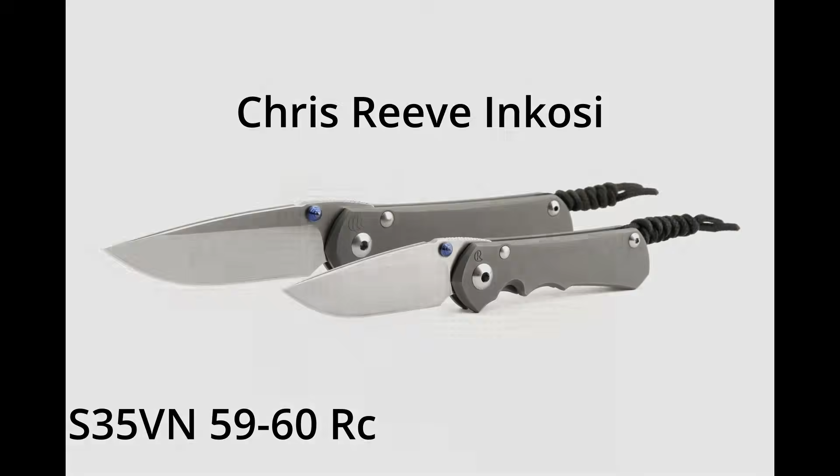Sometimes the reasons are good and sometimes they aren't. Some reasons are practical based on limitations in heat treating and manufacturing, though sometimes they have the customer in mind when making their decisions. So I'm going to explain some of those limitations and specific times when heat treating decisions can lead to bad performance, even when the hardness looks good on the spec sheet. Let's get into it.

One reason why I think there has been increased focus on hardness in recent years is because there has been a gradual evolution in hardness, especially in higher-end production knives and custom knives. We are seeing a growing number of knives available at 62 Rockwell C and above. It's not that high hardness knives weren't available before, but they seem to be becoming more mainstream, and it is a specification that certain knife enthusiasts are looking for when purchasing a knife.

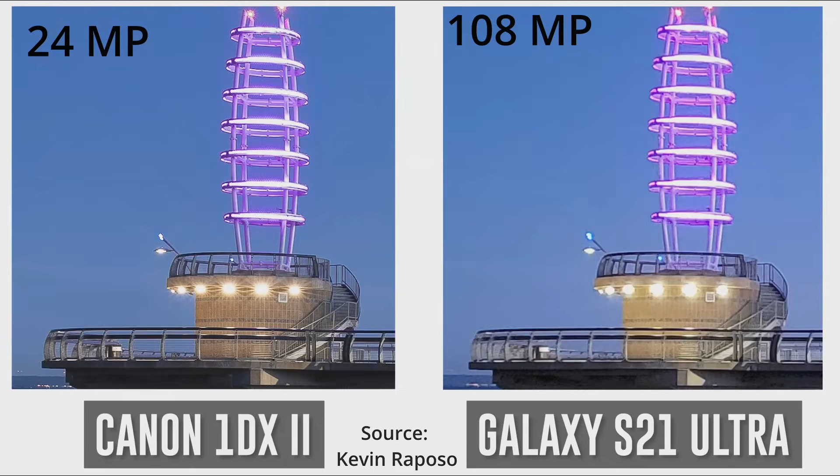For some buyers, perhaps they are focusing too much on hardness. It can be a bit like the megapixel wars of digital cameras back in the early to mid-2000s. The number of megapixels is one measure of quality, but it can be misleading because the quality of the optics is much more important than the number of megapixels. A low-end steel or a poor heat treatment can be used to give a high Rockwell hardness number, which looks impressive on the spec sheet, but ultimately the performance of the knife may be poor.

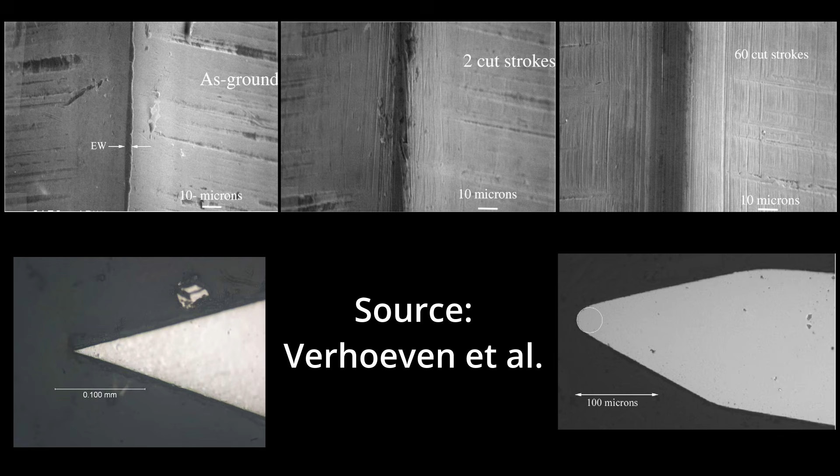So let's start with a simple subject that is somewhat easy to understand. Edges often lose sharpness to wear. The sharp edge is abraded away, leading to a rounded apex that no longer cuts as well. A steel with higher wear resistance has better resistance to sharpness loss due to edge wear. Heat treating to higher hardness means better wear resistance.

If you think about the Mohs scale of scratch hardness, talc or gypsum are easy to scratch with your fingernail. They have low wear resistance and low hardness. However, quartz, topaz, or especially diamond are very difficult to scratch and have excellent resistance to wear. Steel works similarly in that the higher its hardness, the more difficult it is to abrade away the steel. However, the differences in edge wear due to hardness are perhaps not as stark as you might think.

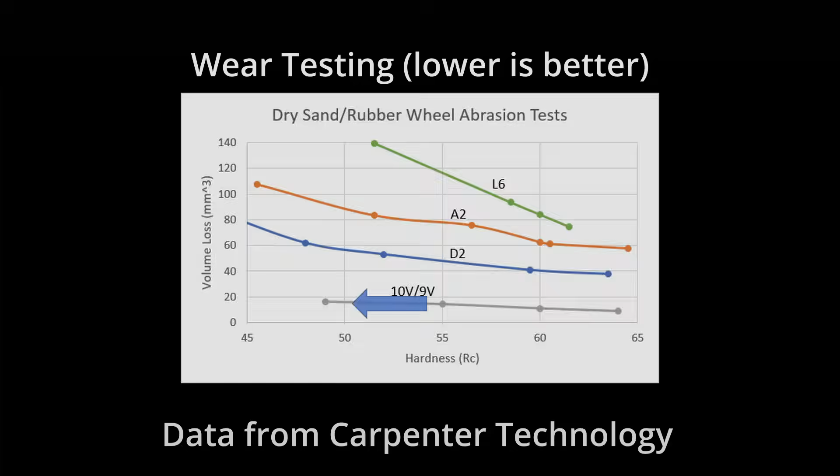Simple steels have relatively low wear resistance, and heat treating them to a high hardness only does so much. It has improved wear resistance at higher hardness, but a steel with a large amount of vanadium would still have vastly better wear resistance even at much lower hardness. The high vanadium steel has hard vanadium carbides that resist wear even if the steel matrix is not particularly high in hardness. The CATRA test is a common test of edge wear.

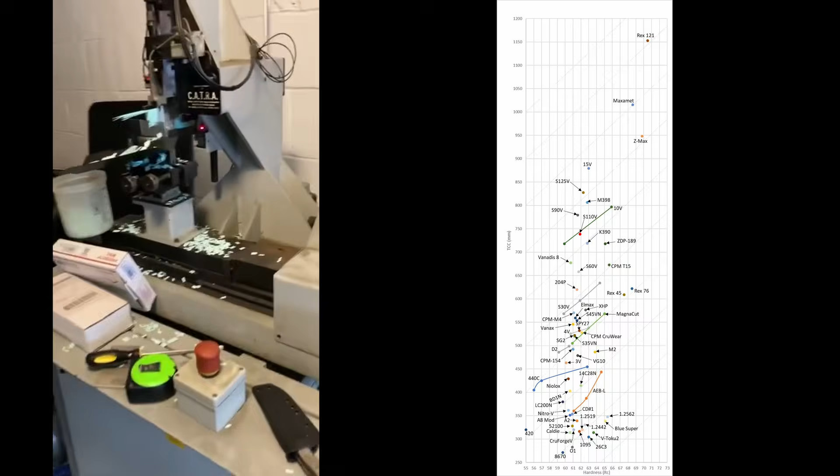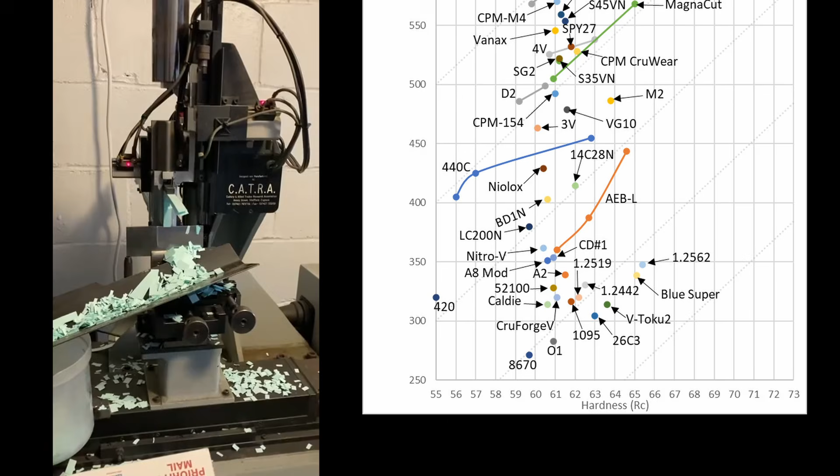You can see that 60 Rockwell C CPM 10V, a steel with about 10% vanadium and therefore a lot of vanadium carbide, has significantly better resistance to edge wear than 64 Rockwell C AEB-L, a steel with a relatively small percentage of softer chromium carbides. So better edge wear resistance is one reason for higher hardness, but is perhaps not as important as you might think.

MagnaCut has wear resistance approximately equal to steels S35VN, CPM CruWear, Vanax, Elmax, and 4V. Those are all a small step down from S30V, S45VN, and M390 at equivalent hardness. MagnaCut at high hardness can match the wear resistance of a steel like S45VN at its typical hardness of 61 Rockwell C.

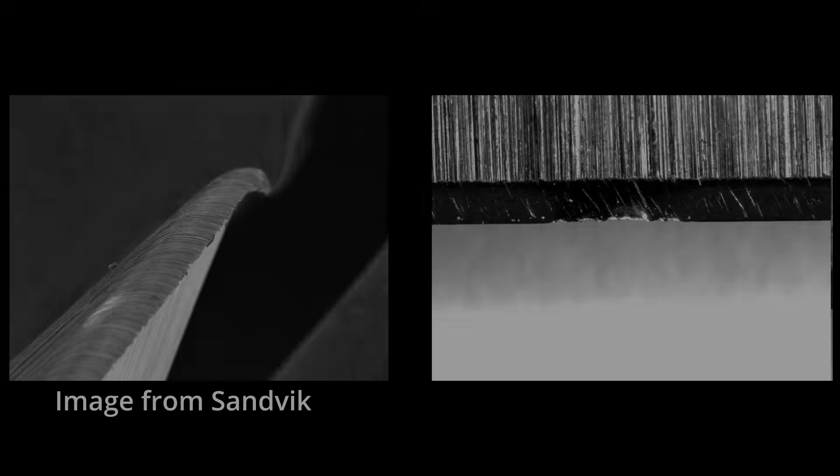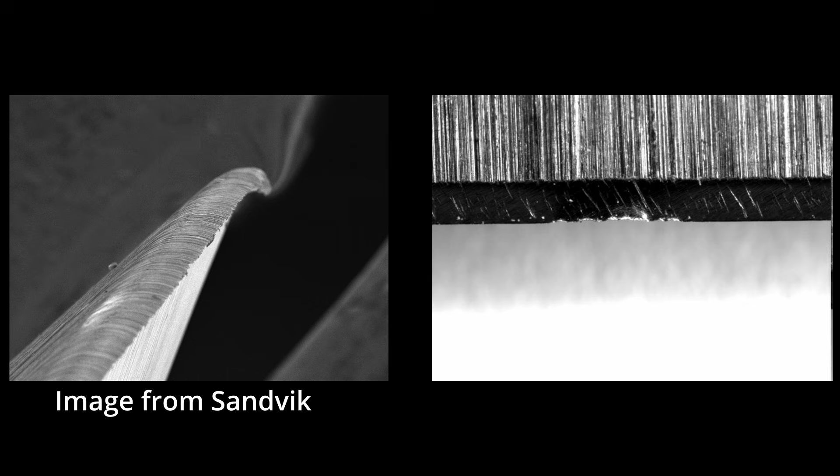Another common way that steels lose sharpness is through deformation. The edge will literally fold over or mushroom during use. This is of course most common with thin edges and high forces being applied. So this will depend on the type of knife, the user, and the specific thing being cut and in what way. Hardness correlates very well with strength, and strength is essentially the measure of resistance to deformation. So a steel with high hardness is more resistant to deformation.

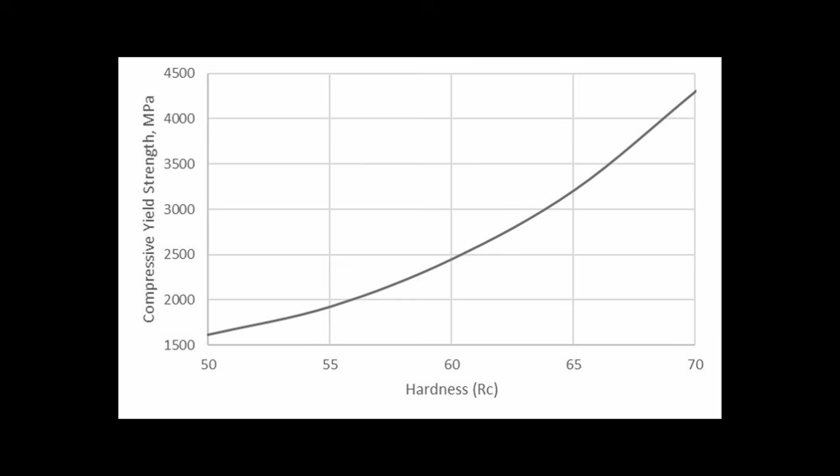In some applications, wear does not come into play that much, and you lose sharpness primarily to other mechanisms such as deformation. So the actual strength of the material may matter more than its wear resistance. MagnaCut can be heat treated to 64 or even 65 Rockwell C when heat treated carefully along with cryogenic processing. So its upper limit for hardness is relatively high. That doesn't necessarily mean that we want to use it at that hardness, but it has that capability.

As an example of an edge retention test with a mixed mode sharpness loss, I have here a test done by knife maker Sean Houston that he posted to the Spyderco forums.

He used several Spyderco PM2s in different steels and measured the change in BESS sharpness with cuts in 3/4 inch manila rope. Each knife was sharpened to 14 degrees per side using a fixed angle sharpening system and tested at different points on the way to a total of 127 cuts.

The MagnaCut PM2 here is a prototype and is not available for purchase.

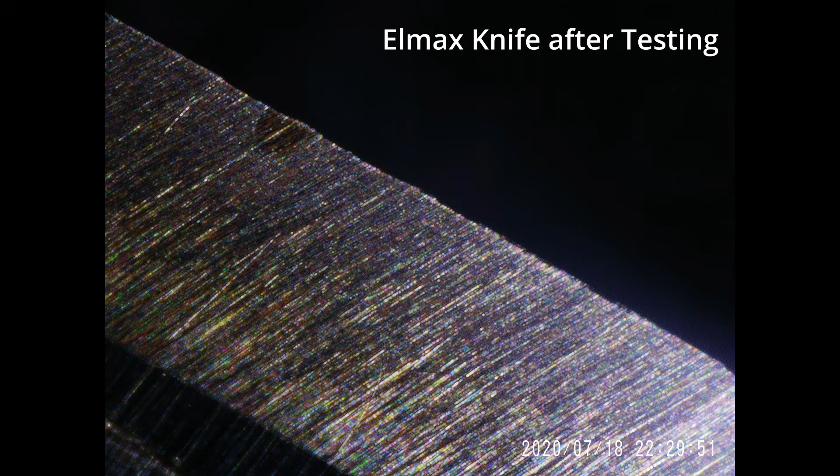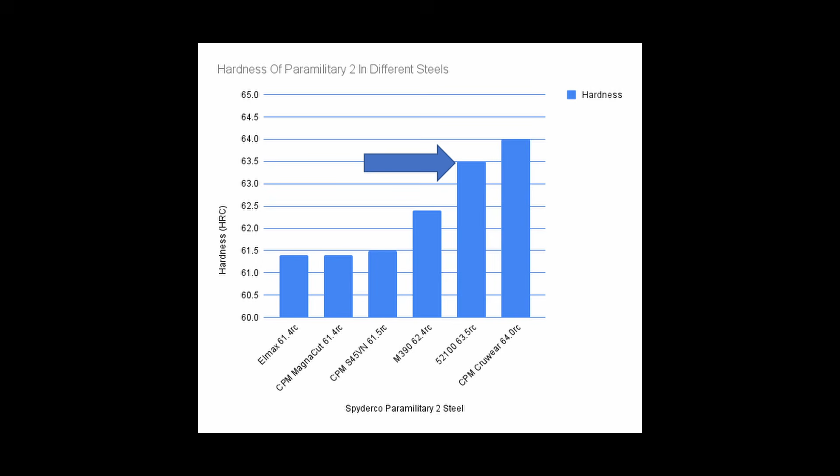Sean told me he was surprised by how much force was required to cut through the rope, especially at later stages of the test, and looking at the edges under magnification revealed deformation. The hardest knives were CPM Cruwear at 64 Rockwell C and 52100 at 63.5 RC, and they showed the least deformation as expected. However, edge wear was also seen, most visibly apparent in the 52100 knife, as that steel has by far the lowest wear resistance in this comparison, and so still saw the worst sharpness of any knife at the end of the test.

S45VN, Elmax, and MagnaCut were similar to each other around 61.5 Rockwell, and also performed similarly on rope. However, S45VN and Elmax have slightly better wear resistance than MagnaCut, and also lasted a bit better after 127 cuts on the rope.

M390 was the most wear-resistant steel tested and was also relatively high in hardness at 62.4 RC. CPM Cruwear has somewhat less wear resistance than M390 even at this high hardness of 64 Rockwell, but because of its excellent combination of strength and wear resistance, it actually nearly matched M390, even though M390 has somewhat better wear resistance. CPM Cruwear and MagnaCut have very similar wear resistance, so we would expect 64 Rockwell MagnaCut to perform similarly.

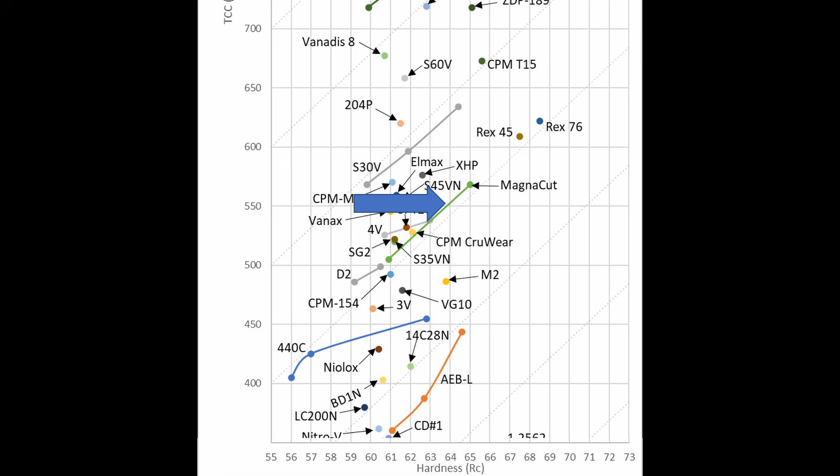This gives us an idea of how much extra edge retention you can get in a cutting scenario that sees high forces and therefore significant amounts of deformation at the edge. However, if the edge geometry of these knives was different, or if the forces were lower or higher in the cutting test chosen, the order of the knives could change drastically.

This is why sometimes I prefer to test different properties separately, such as CATRA for edge wear, hardness for strength, toughness for chipping resistance, etc., so that we can choose steels based on their strengths and weaknesses.

When we do a test like rope cutting, there are a combination of factors at play, and the edge geometry we choose will also change the balance of which properties are important. This can make it difficult to figure out exactly what is going on. That doesn't make rope cutting tests bad, it just makes our analysis more challenging.

I like the set of tests that Sean did because it illustrates well how hardness and wear resistance can add up together in a specific scenario.

Another of the major dulling mechanisms is microchipping. When you lose sharpness to microchipping, the steel does not have sufficient toughness for the intended use. Toughness is a measure of how well a steel resists fracture.

Microchipping is especially common in knives with thin edges, so steels with high toughness are preferred for applications that lose sharpness to microchipping. Fracture can be quite sudden, leading to very rapid sharpness loss, so generally we prefer edge wear to be our primary mode of dulling. Microchipping is most common when cutting hard materials and any time that chopping is involved.

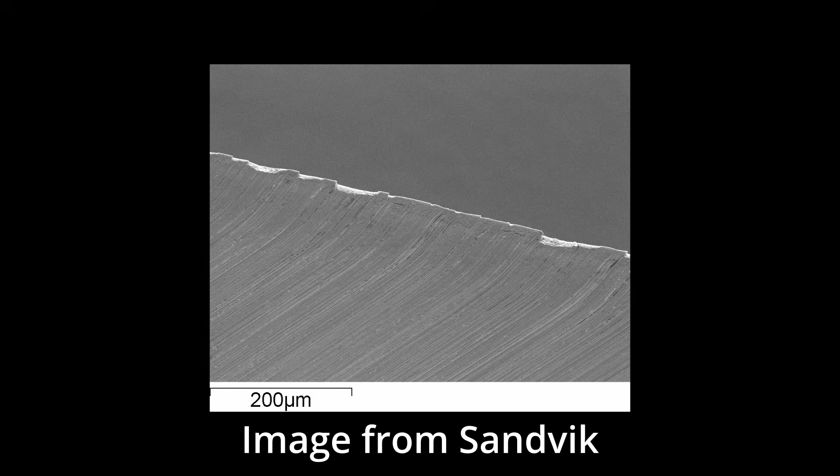Which leads me to the subject of edge geometry. If your knife is seeing deformation or microchipping, you need to sharpen it with a more obtuse angle. This gives the knife better resistance to deformation and microchipping by giving it a more robust edge.

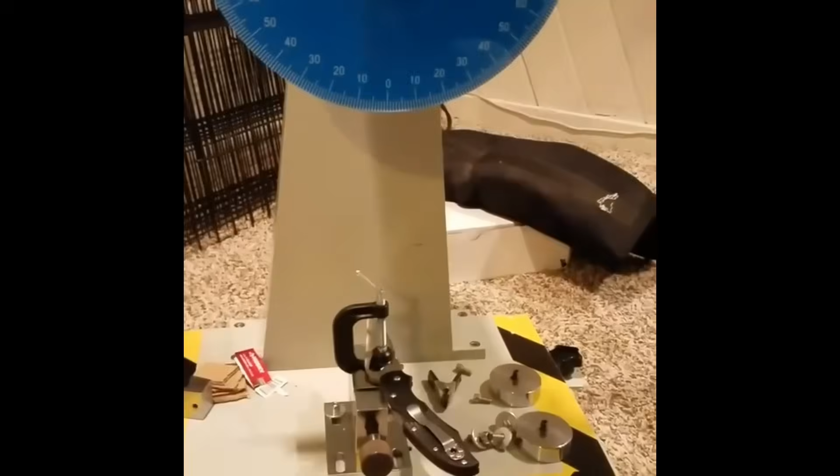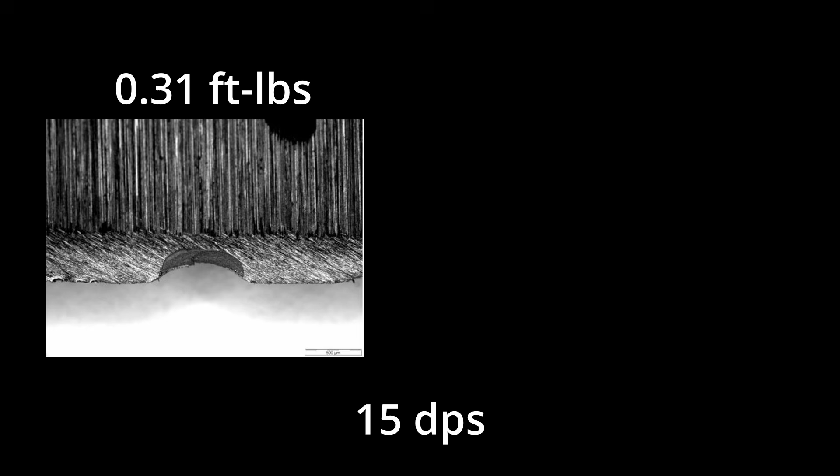In a test I did on AEB-L knives, I impacted them with a steel rod at different energy levels, from a gentle tap to a loud smack. With an edge sharpened to 15 degrees per side, only 0.31 foot-pounds led to a significant chip in the edge, and 1.4 foot-pounds was so severe that the chip exceeded the size of the edge bevel, at which point the chipping is catastrophic. With an edge sharpened at 25 degrees per side, 2 foot-pounds led to only minor rippling of the edge and needed 4 foot-pounds for catastrophic chipping.

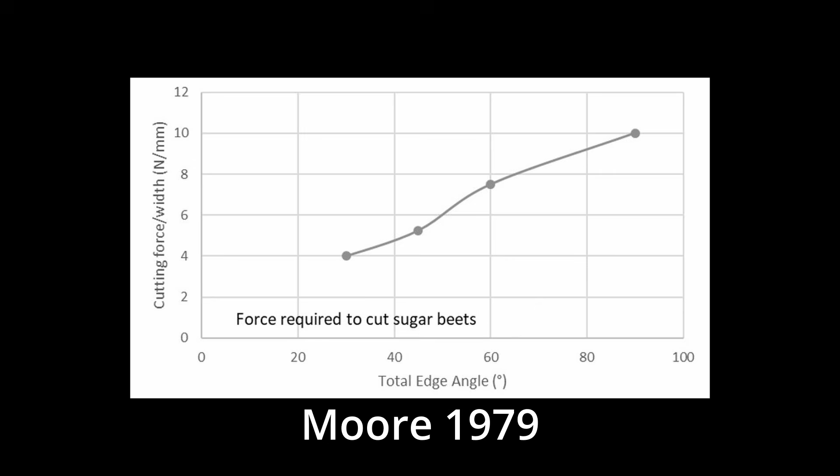So why not just sharpen everything to a very obtuse angle and make it super strong and tough? Because the more acute the angle and the thinner the edge, the better it cuts. This is a property called cutting ability, which is separate from sharpness. Sharpness is defined by how small our edge radius is, but cutting ability is controlled by the overall edge geometry.

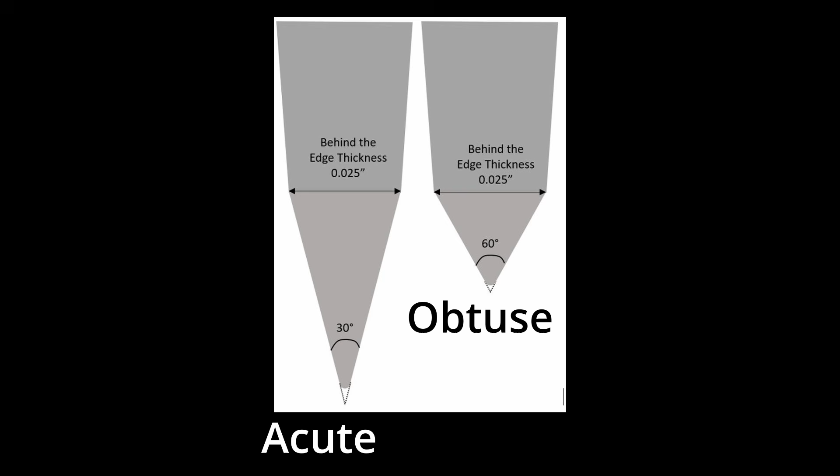So if the sharpness is identical, the edge that is thinner and more acute will cut more easily and with less force. And this doesn't just mean that the knife will pass through what you are cutting more easily, but it also means better edge retention.

In a CATRA study on 154CM and CPM 154, they varied the angle from 10 degrees per side all the way up to 28 degrees per side, or 20 to 56 degrees inclusive angle.

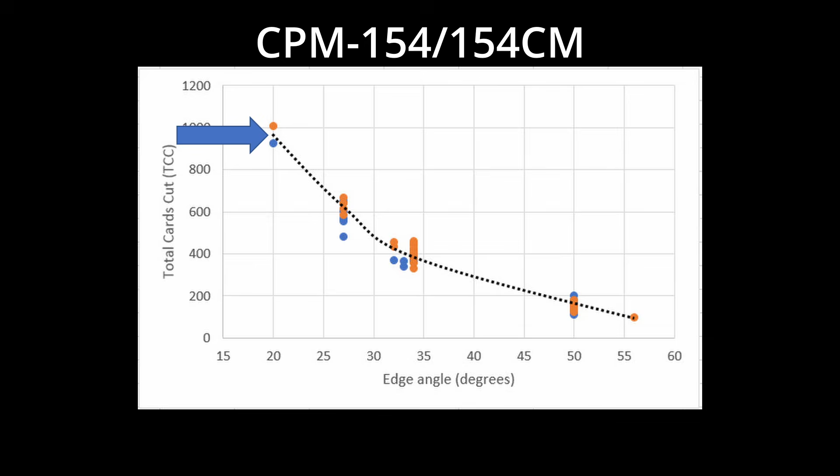The 10 DPS edge had more than 5 times the edge retention of 28 degrees per side. A steel with average wear resistance can outcut a so-called super steel with high wear resistance if the edge angle is dropped by only a few degrees per side.

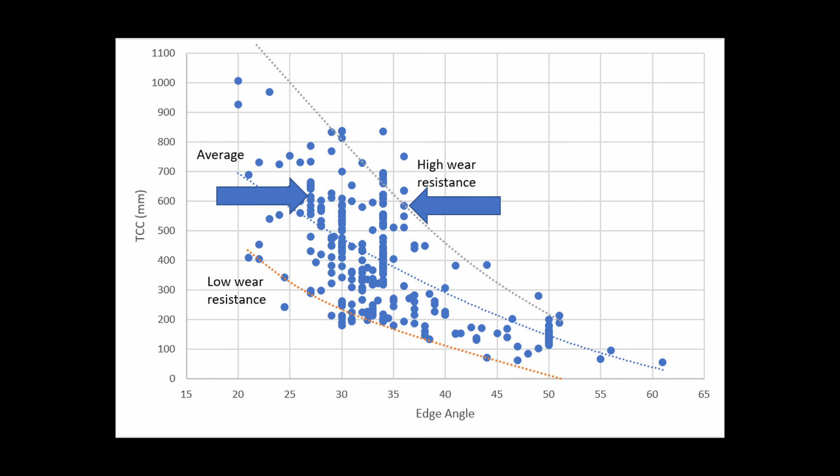For example, let's compare CPM 154 and S90V. CPM 154 has only 60% of the wear resistance of S90V. This data point is S90V sharpened to 18 degrees per side, which cut about 585 mm of cardstock in the CATRA test. CPM 154 sharpened to 13.5 degrees per side outcut it at 615 mm of cardstock cut.

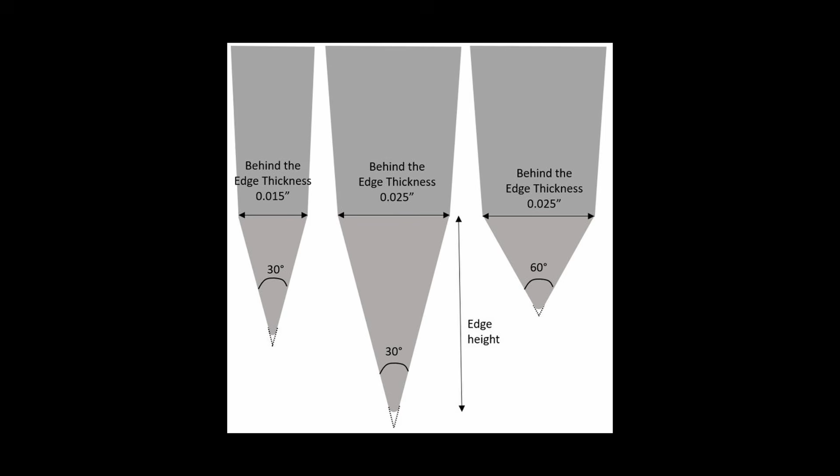So this trade-off in edge geometry is one of the major decisions with any knife, both by the knife manufacturer and how thin and acute to go, but also by the user, who of course has the option to sharpen his knife how he wants.

Go very acute and get superior cutting ability and edge retention, or go more obtuse and get better resistance to deformation and chipping. I generally recommend trying more acute and seeing how the knife does. If you start to see deformation or chipping, then back off a couple degrees until you find the sweet spot for how you use your knife.

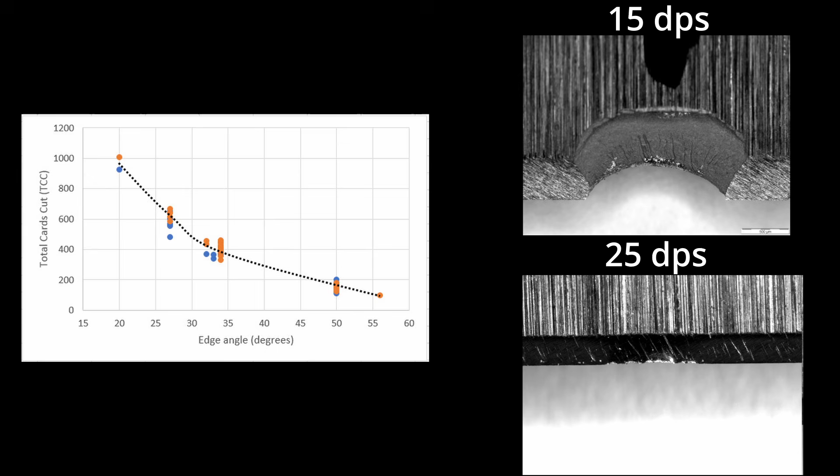Where steel and heat treatment comes in is how well it can handle a thin, acute edge without deformation and chipping. We want high hardness for resistance to deformation and high toughness for resistance to chipping. Sometimes this combination of properties is called edge stability, or the ability of the steel to handle an acute edge without deformation or chipping. Unfortunately, having increased hardness almost always means reduced toughness.

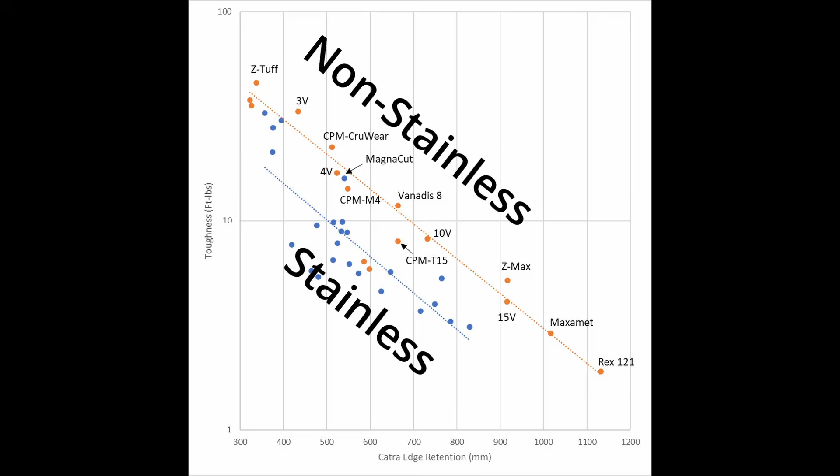So having a steel that maintains high toughness at high hardness is desirable so that we have the best cutting performance possible. Non-stainless powder metallurgy steels generally have the best combination of hardness and toughness for a given level of wear resistance. If we look at a fixed level of wear resistance, in the past steels like CPM 4V and CPM CruWear had approximately 2 times the toughness of S35VN, even though all three have similar wear resistance.

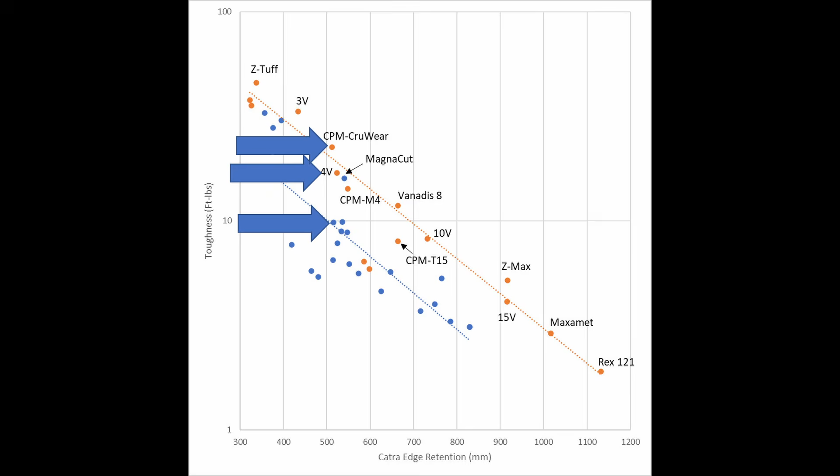So CPM 4V can be heat treated to a higher hardness for better cutting performance without being in danger of microchipping. At the higher hardness level, it also has increased edge wear resistance for overall better performance than the S35VN.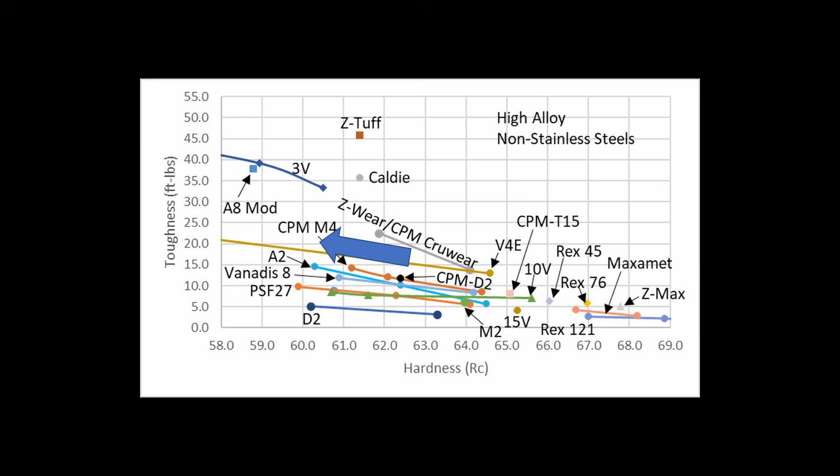Or if you are making a knife designed for hard tasks with more danger of chipping and deformation, you can leave the hardness at a lower level, such as 60 or 61 Rockwell, and take advantage of the superior toughness.

The benefit to MagnaCut is that it matches the toughness and wear resistance of non-stainless steels like 4V, and therefore puts us in a new category for stainless steels.

It can be heat treated to higher hardness for enhanced edge stability for more acute edges, better cutting ability, and better edge retention without sacrificing toughness when compared with previous stainless steels, or kept at a more conservative hardness when raw toughness is desired.

MagnaCut toughness at 64 plus Rockwell C matches or exceeds the toughness of Vanax, S35VN, or Elmax when they are at only 61 Rockwell C or lower. Those were the previous gold standards for toughness with powder metallurgy stainless knife steels.

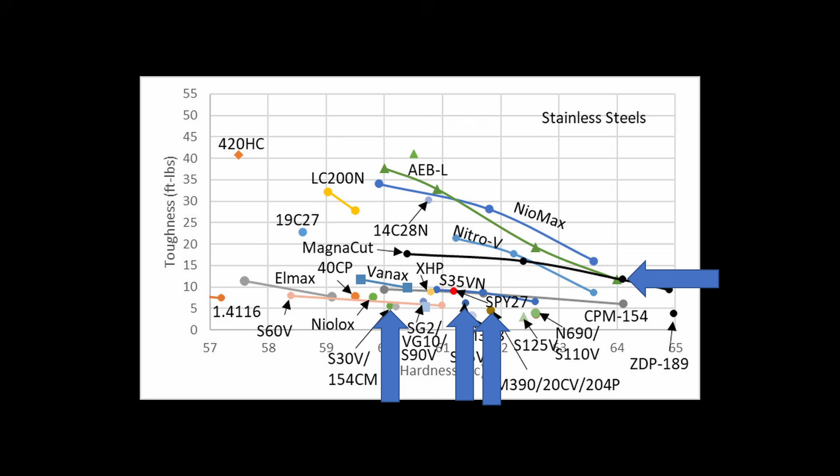For the somewhat higher edge retention steels like S30V, S45VN, and M390, MagnaCut at 64 Rockwell C has double the toughness of those steels when they are at their typical hardness of 62 Rockwell or below. So MagnaCut has the potential to handle thinner, more acute angles for superior cutting ability and edge retention.

And if we compare in the 60 to 61 Rockwell C high toughness range, MagnaCut has significantly better toughness than other PM stainless steels such as Vanax, S35VN, XHP, and CPM 154.

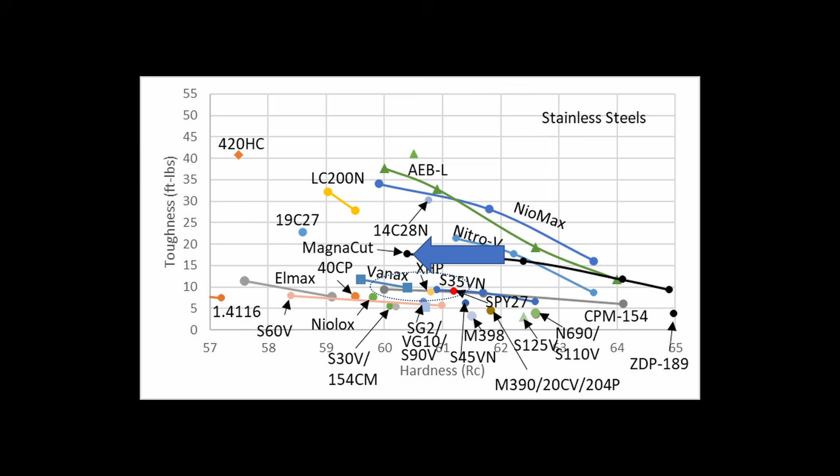As a quick sidebar, another mechanism by which an edge can dull is through corrosion. I did an experiment a few years ago with knives of different levels of corrosion resistance. I dipped each knife in lemon juice and sat them in air and measured after different periods of time. The sharpness loss was significant on the carbon steel and almost non-existent with 440A stainless.

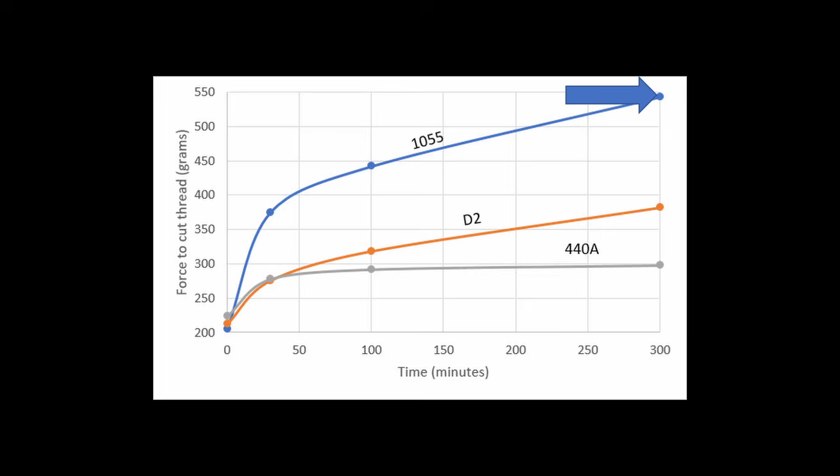So the high corrosion resistance of MagnaCut is also a benefit for this dulling mechanism. There are a couple of heat treating and processing parameters for corrosion resistance, but they don't all fit into the topic of hardness, so I won't be going into depth on those in this video.

So let's get into the specifics of heat treating MagnaCut and why manufacturers and heat treaters might be picking certain hardness values over others. The place to start is the datasheet, which is hopefully where the heat treaters are starting. A feature of several Crucible datasheets is the recommended heat treatment section. For example, the S30V datasheet says to use a 1950 degree austenitize and a temper at 600 degrees for a final hardness in the range of 58 to 61 Rockwell.

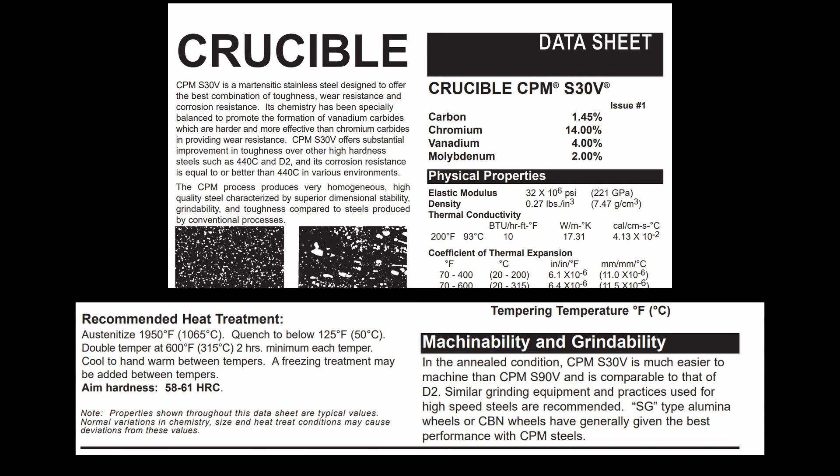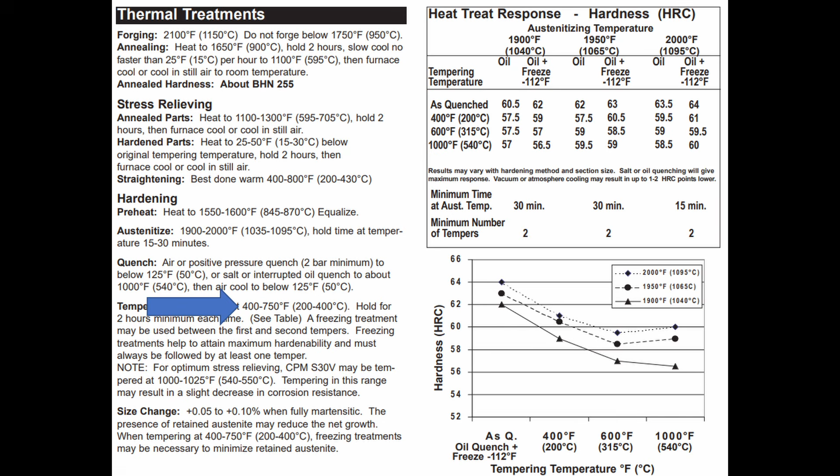However, that is just one set of temperatures among many that can be chosen. The datasheet also says that you can austenitize between 1900 and 2000 degrees Fahrenheit and temper between 400 and 750 degrees. There is also an optional freezing treatment that can be performed for extra hardness.

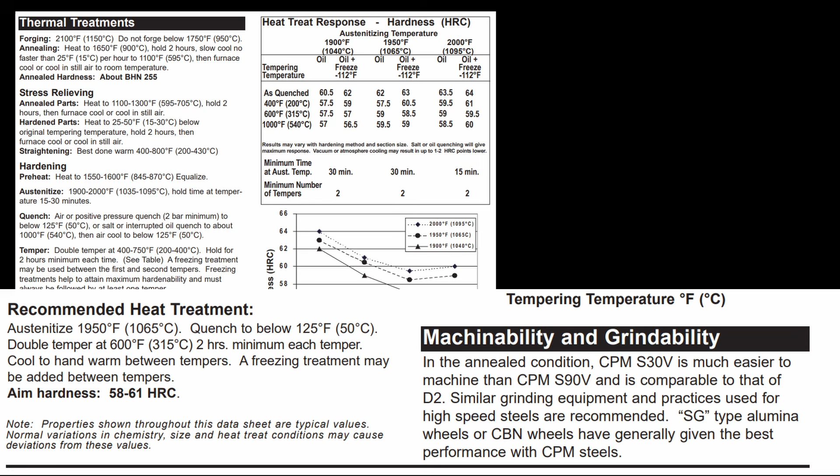The recommended heat treatment is to provide the most general recommendation to give good performance without extremes. It shouldn't require extremely careful heat treating, meaning if the temperature is off by 10 or 20 degrees in any given direction, the steel should still be fine. The further away that you get from that recommendation, the more trouble you can get into if you don't know exactly what you are doing.

These hardness values are for a relatively fast quench, meaning with an oil quench or what's called a plate quench. This is common with custom knife makers where they put the hot steel between two aluminum plates and the plates draw heat out of the knife. It is faster than just cooling in air while also helping to keep the knife flat.

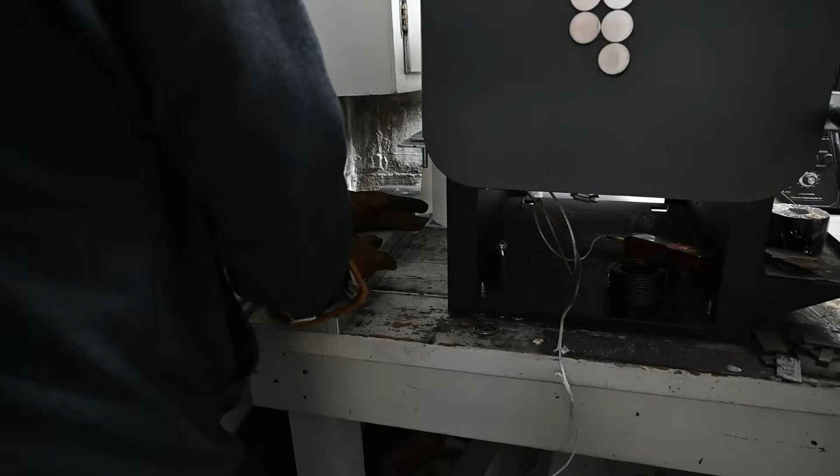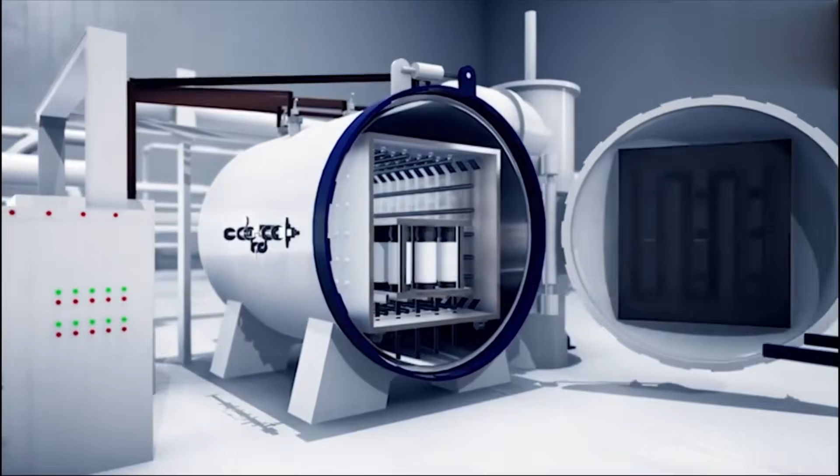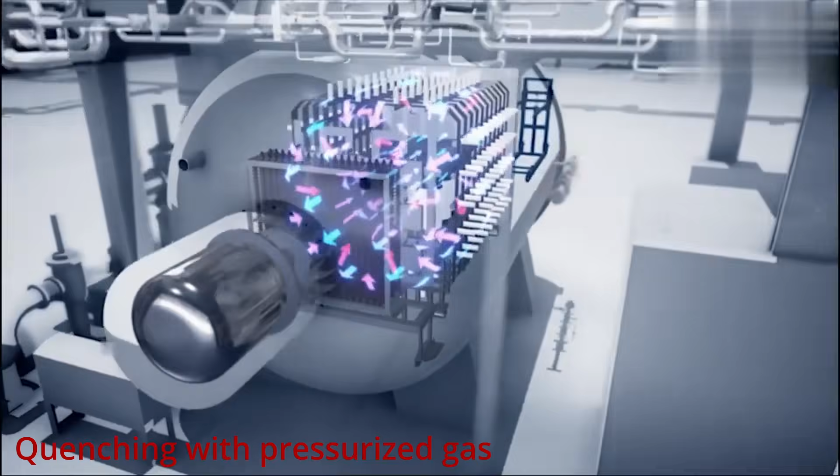We also did tests using vacuum furnaces at Peters Heat Treating where the steel was given an air quench under 2 bars of pressure. The steel was somewhat softer due to the slower quench speed, but with cryo the hardness was still comparable, around 61.5 Rockwell C. So depending on the specifics of the heat treatment setup, we might expect manufacturer knives to be 61 to 62 Rockwell if they follow these recommendations.

Will they follow the recommendations? As with anything, it depends on how much the heat treater thinks they know better than the steel manufacturer. It can be surprising what any given person or company decides to do sometimes.

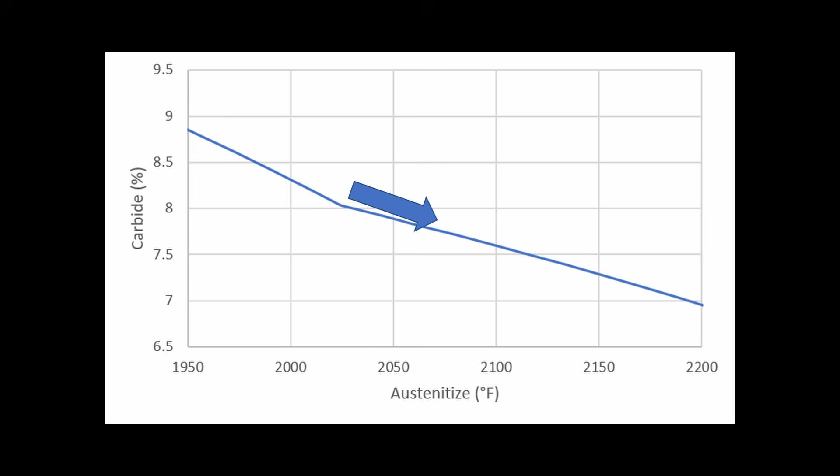If you want more hardness, there are two major ways of accomplishing it. One is with a higher austenitizing temperature, and one is with a lower tempering temperature, though cryogenic processing also comes into play. With a higher austenitizing temperature, more carbide is dissolved, putting more carbon in solution, and the higher the carbon in solution, the higher the hardness.

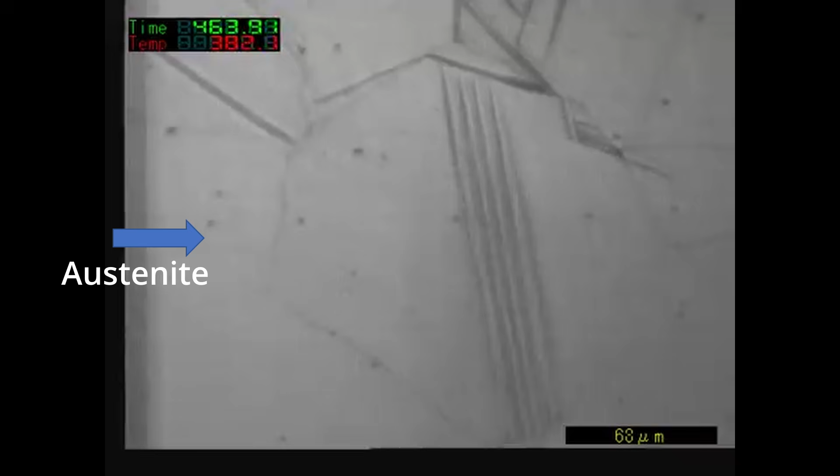However, at a certain point, the hardness begins to drop because we get what's called retained austenite. At high temperature before the steel is quenched, you convert the steel to a non-magnetic phase called austenite, and then during quenching, it transforms to a hard phase called martensite that gives us the high strength and wear resistance that we want. However, the transformation can be incomplete, leaving us with some retained austenite.

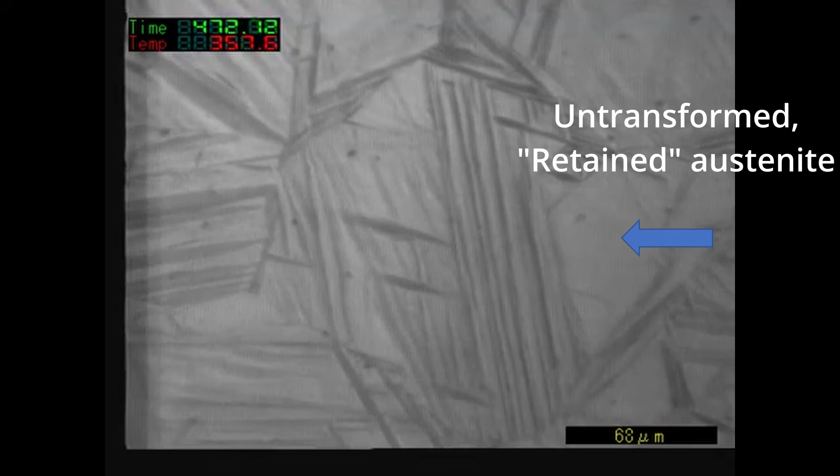When more carbon and alloy is dissolved at high temperature, this reduces the temperatures where martensite forms to a point where the transformation is incomplete at room temperature. A cold or cryo treatment can further cool the steel where more austenite transforms for more martensite and higher hardness. I have a separate video about cryo that explains how all of this works.

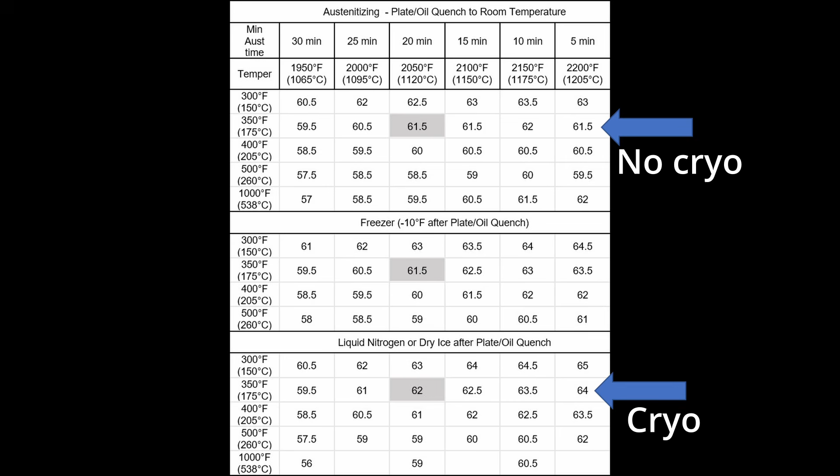Retained austenite in small amounts can improve toughness, but it will reduce strength and hardness, and generally we don't want it. In large amounts, it can actually reduce strength even at a given level of hardness, so we are going to take a quick detour and talk about different measures of strength.

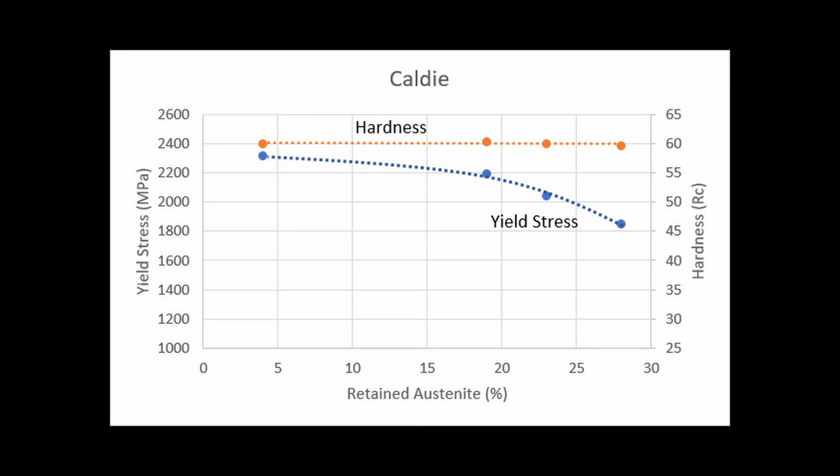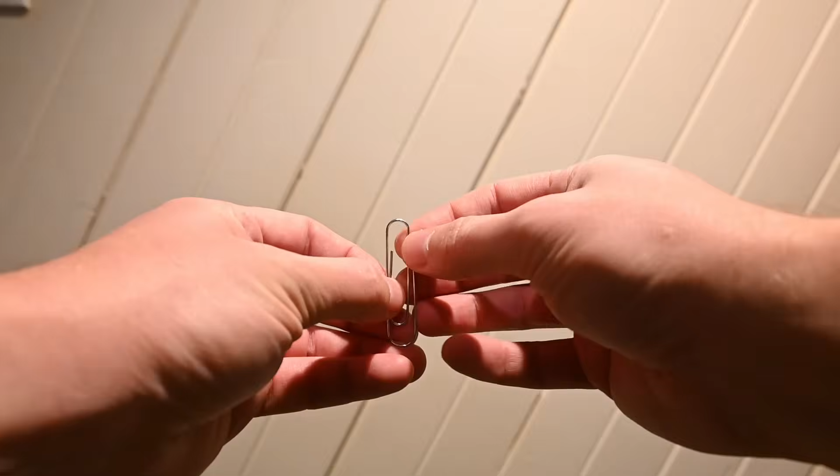When we pull or compress a material, we can measure how it responds to stress. Under small amounts of stress, the material will lengthen or compress, and when we let go, it will bounce back to its original shape. Think of this like a rubber band. Or if you can imagine bending a paperclip, this is like bending the paperclip a small amount and letting go. However, if you apply more stress, at some point the steel will permanently deform and no longer return to its original shape.

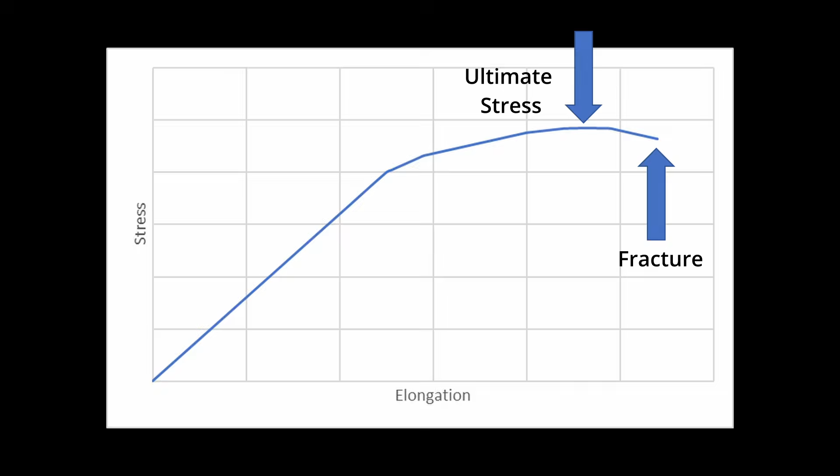This means that you have exceeded the yield stress of the material. If you bend the steel too far, you will exceed the ultimate tensile stress of the material and it will break. Hardness correlates most strongly with ultimate tensile strength. However, it is the yield strength that determines how easily the material permanently deforms. And in some cases, we can have a material with a relatively low yield strength when compared with its ultimate tensile strength or its hardness. In this case, the steel will deform more easily than we expect based on its hardness.

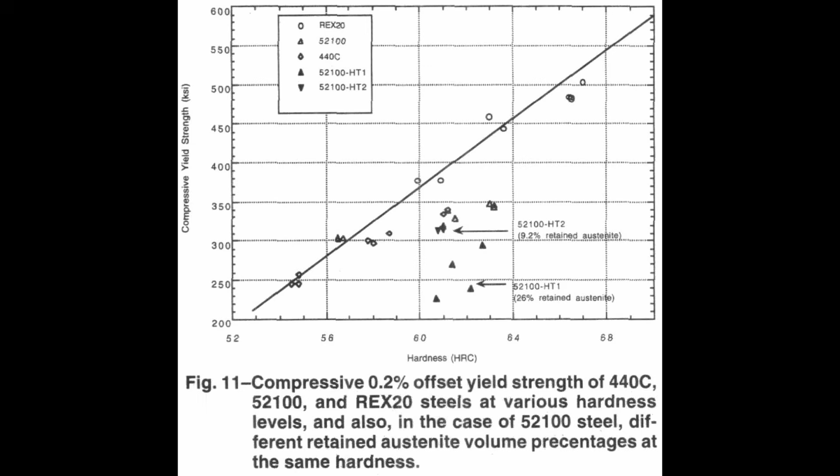Another side effect is that steels with excess retained austenite show very poor sharpening behavior. I sometimes see cases where people say that such and such steel is very difficult to sharpen, but what they are actually seeing is a poor heat treatment.

In a big Catra study I did, I was able to relatively easily sharpen a wide range of steels, but one in Rex 121 that had high retained austenite in it never seemed to come up sharp. I would get a burr, and then once the burr came off, it would leave a ragged edge that wasn't particularly sharp. We later did a follow-up study with a different heat treatment of Rex 121 and had no problems getting it sharp. So sometimes people blame difficulty in sharpening on a steel being very wear resistant, when in fact it is the heat treatment that is to blame.

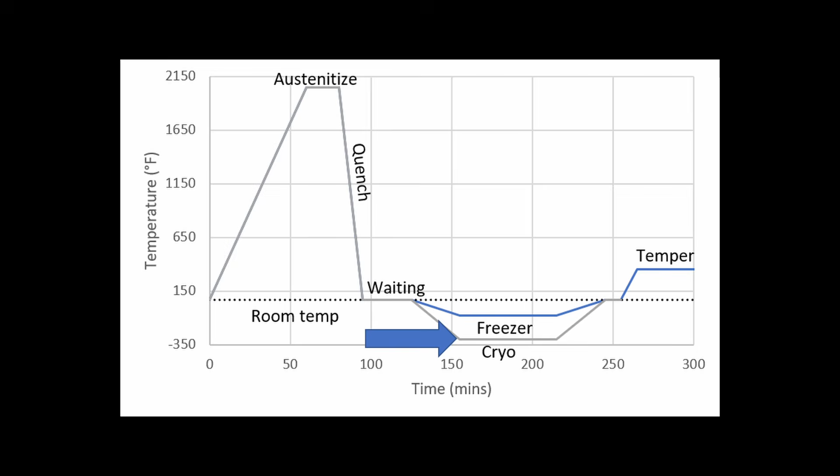Many heat treatment shops have cryogenic processing or at least some kind of freezing treatment available, but the type of process they can do varies. They might have a freezer that goes down to negative 80 degrees Fahrenheit, or they might have a liquid nitrogen freezer that goes all the way to negative 300 degrees. They may have a freezer that cools down the steel very slowly to the target temperature, or a freezer that sits at the low temperature and the steel cools down rapidly.

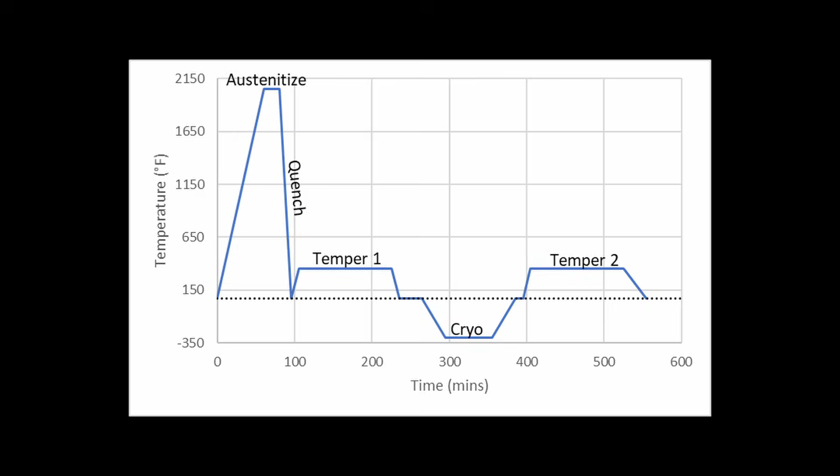Some shops will do a temper on the steel before doing the cold treatment. Some shops will move the steel directly after the quench to the cold treatment, while others, because of various logistical issues, may leave the steel at room temperature for some period of time, maybe hours, before moving it to the freezer.

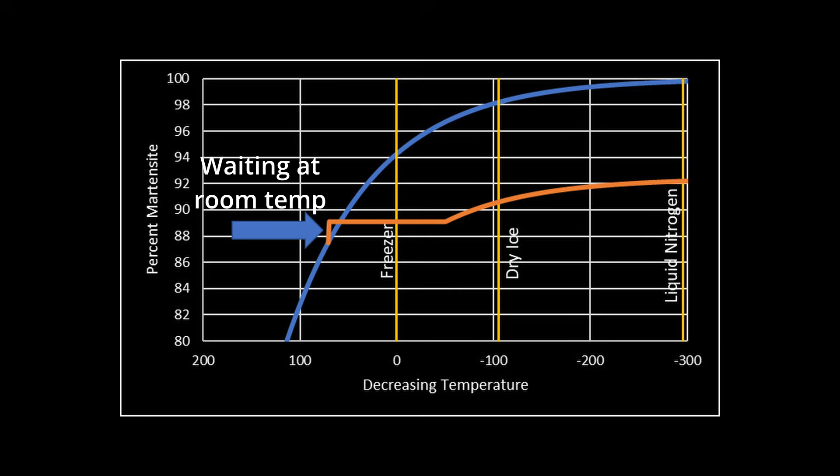All of these differences can matter. When steel sits at room temperature, or especially when it is tempered first, some of the retained austenite is stabilized and will not transform during a cryo treatment.

So part of the reason why 2050 degrees is the recommended heat treatment for MagnaCut is because even if they are doing a temper before cryo or letting the steel sit for a long period of time, it won't have excessive retained austenite. To get the steel to its maximum levels of hardness, it would require a heat treating company or knife maker that knows how important it is to go straight to the cold treatment after quenching to get the maximum benefit. However, part of the reason they do tempering before cryo is because it reduces the risk of warping or cracking of the knives.

In my opinion, it is more important to get the maximum performance benefit of the cryo treatment, but the knife companies or heat treating companies may not share that view when they have thousands of knives they need to produce. To get 64 Rockwell C MagnaCut, and this is true of most stainless knife steels that can achieve that hardness, it requires an increased austenitizing temperature in combination with a cryo treatment that occurs directly after quenching to room temperature.

Another method for having increased hardness is to use a lower tempering temperature. You can temper at 300 degrees or even 275 or 250 degrees Fahrenheit and have increased hardness. There are a couple potential issues with this approach, however.

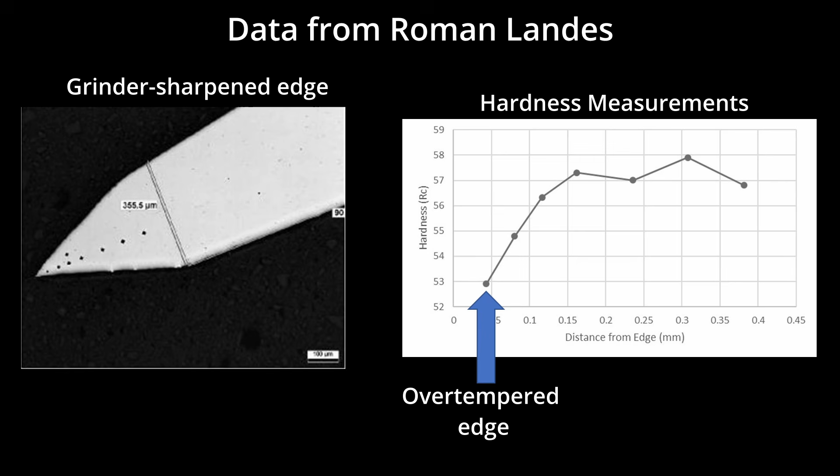One is that the blade, and especially the edge, can overheat when it is ground and sharpened. The lower the temperature of tempering, the easier it is to overheat and over-temper the edge, which would then reduce hardness. If the steel is heated above the tempering temperature, it is effectively tempered at that higher temperature, reducing hardness.

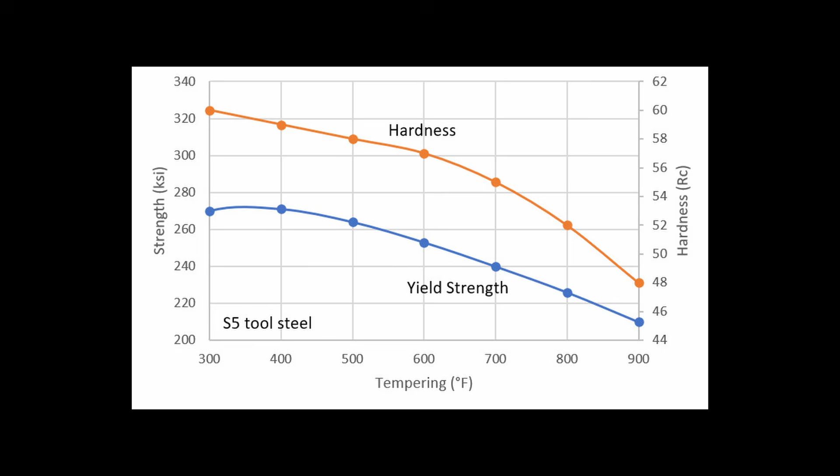Another concern is that even though the hardness is higher with these very low tempering temperatures, often the yield strength goes up as the tempering temperature increases in the low temperature range. So the steel may deform more easily than you think based on the hardness value. I usually don't recommend tempering any lower than 300 degrees Fahrenheit.

Some knives have coatings applied to them that require the knife to be heated to 500 degrees or even hotter, which would mean the knife would effectively be tempered at that temperature. So sometimes knife companies use what is called the secondary hardening range of tempering.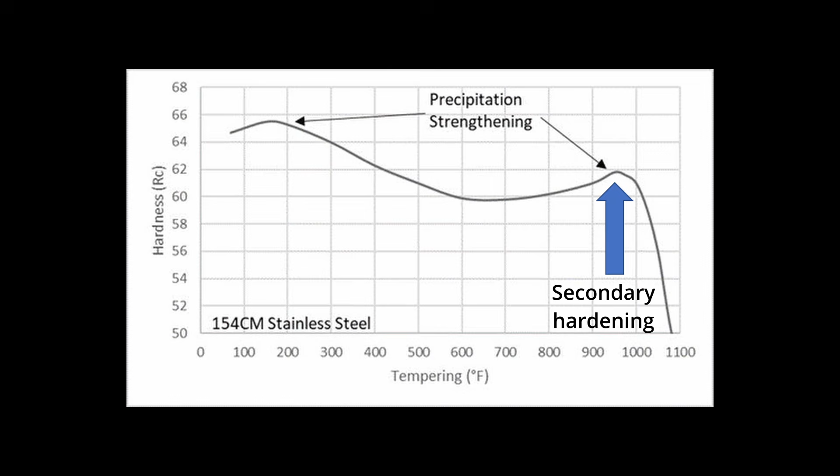When you temper above about 750 degrees, the hardness starts to increase again with certain high alloy steels and stainless steels. So MagnaCut could be tempered in the range of 950 to 1000 degrees. This would limit the hardness to around 62, maybe 63 Rockwell C.

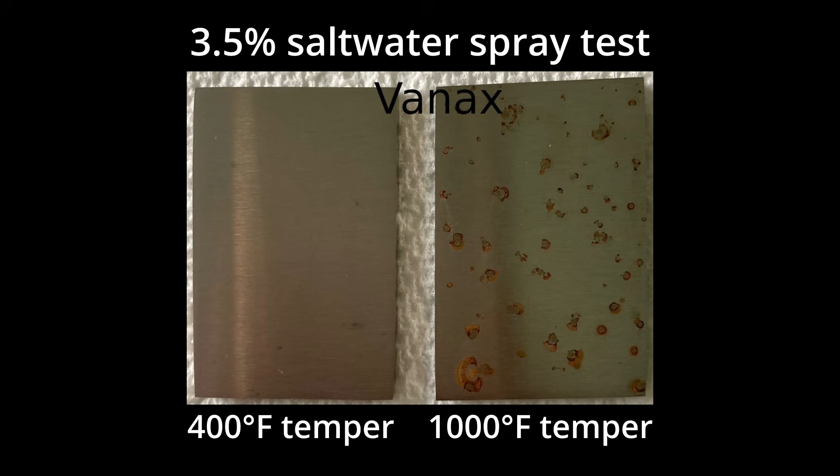Once the steel has been tempered at 1000 degrees, you can reheat the steel up to nearly that temperature without affecting its properties. The bigger issue is that corrosion resistance is significantly reduced when tempering in this range. Small chromium carbides are precipitated in the steel when tempered that high, which pulls chromium out of solution and reduces corrosion resistance. In my testing, this can turn even very corrosion-resistant steels like Vanax or LC200N into very average steels.

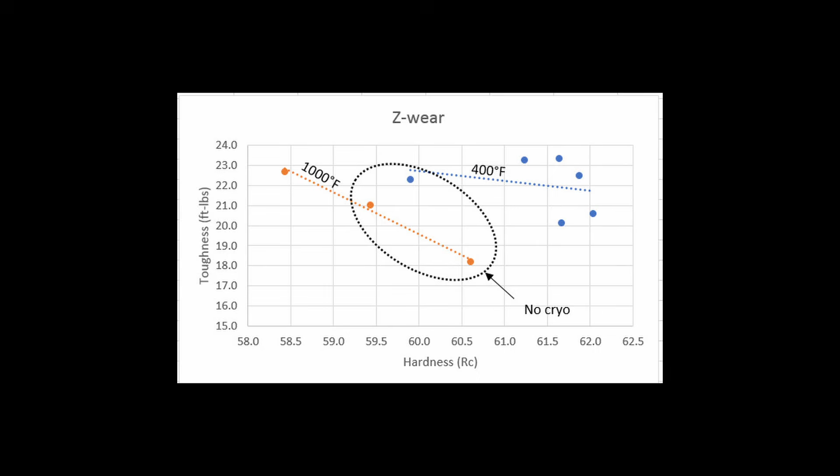And for several steels I have tested like CPM 10V and CPM CruWear, there is also a reduction in toughness when tempering at 1000 degrees instead of 400. So in general, I do not recommend tempering in that range, but it is a relatively common practice, either because of coatings or because they want more resistance to overheating in grinding and sharpening.

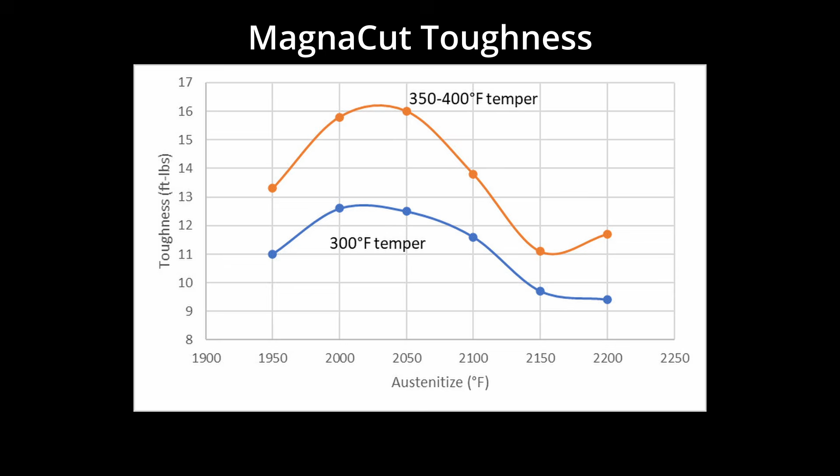In my testing, I saw little or no toughness difference between tempering at 350 or 400 degrees, while 350 gives you somewhat more hardness. This is why 350 is my general recommendation. However, you can go down to as low as 300 degrees when more hardness is desired. Whether this is enough temperature for grinding, sharpening, or coatings is up to the knife maker or manufacturer.

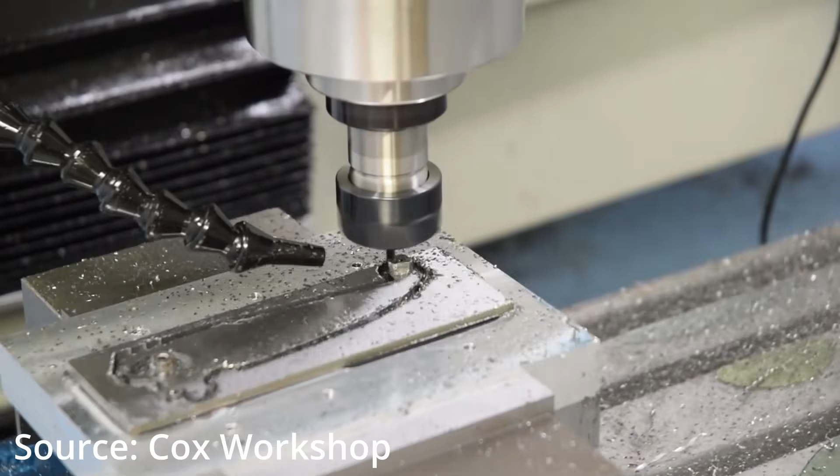Speaking of grinding and machining, this is another factor that knife manufacturers consider when choosing a hardness. Just as higher hardness means better wear resistance for edge retention, it also means it is more difficult to grind and machine the steel. This means more belts for custom knife makers, more grinding wheels for grinding machines, and milling can be very sensitive to changes in hardness. This means shorter tool life, a higher chance of the knife overheating during machining, and other issues. If the knife overheats, that is bad for final performance, of course, but can also mean more movement and warping in machining for potentially even bigger problems.

Costs in tooling, belts, and grinding wheels can easily be more than the cost of the steel itself, so this is one of the major reasons that a knife maker might dial back hardness to save themselves time, money, and headaches.

Another reason sometimes given by knife companies and manufacturers to keep the hardness in check is to facilitate ease in sharpening. Part of sharpening is material removal, which is affected by wear resistance and therefore the hardness. Some users say they don't want hardness to go beyond a certain point in case they are in a situation where all they have is a smooth river rock or the bottom of a coffee cup to sharpen on. I don't sharpen on rocks or cups, so I cannot comment much on that.

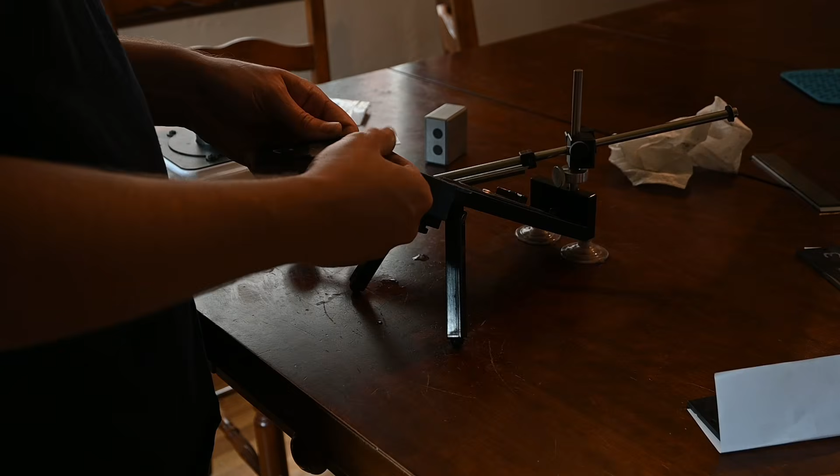But I will say that the amount of material that is removed in sharpening is relatively small, except in cases where the edge is reprofiled, meaning you are sharpening to a new edge angle. Much of the time in sharpening ends up being burr removal, cleaning up the edge, and getting a sharp apex rather than purely grinding away material. This is especially true when using very hard abrasives such as CBN or diamond. In my large CATRA study, I sharpened everything from 1095 to 15V, and the material removal part of it really wasn't that big of a percentage of the sharpening process in that case.

On the flip side, harder steels, assuming they have low retained austenite, often are easier to get to high levels of sharpness. In experiments by Dr. John Verhoeven, in a somewhat extreme example of 40 Rockwell C versus 60 Rockwell C, the edges were rough with poor sharpness with the 40 Rockwell C knives, while the 60 Rockwell C knives had good edges. So when it comes to pure material removal, the lower wear resistance that comes from lower hardness is beneficial, but when it comes to getting the final edge, higher hardness can be beneficial.

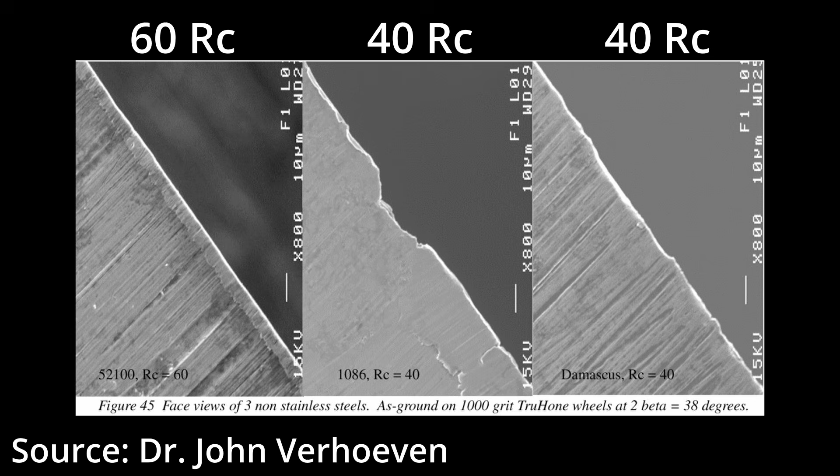However, the perception that low hardness steel is easier to sharpen is often a provided reason for a chosen hardness, and this is unlikely to go away.

Up until this point, we have primarily focused on the pros and cons and difficulties in heat treating for higher hardness. What about reduced hardness for enhanced toughness? Heat treating for lower hardness is the reverse of heat treating for higher hardness. We can either use a lower austenitizing temperature or an increased tempering temperature.

In toughness testing of MagnaCut, I found that toughness was reduced when austenitizing below 2000 degrees, and the toughness was roughly equal between 2000 and 2050 degrees. This means that austenitizing below about 2000 leads to a reduced hardness-toughness balance. This is somewhat counterintuitive, as generally reduced hardness leads to improved toughness, but I have seen similar behavior in some other steels including S35VN, S30V, and S45VN.

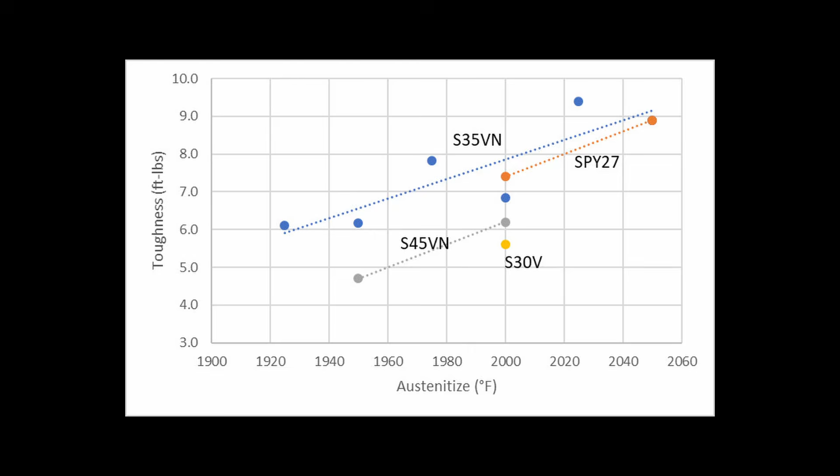During the austenitize, you dissolve some amount of carbide. Those carbides are beneficial to wear resistance and detrimental to toughness. In general, the increased hardness washes out any effect of decreasing carbide by going higher in temperature. But in the case of these steels, there is a crossover point where going lower in temperature means more carbide and therefore lower toughness.

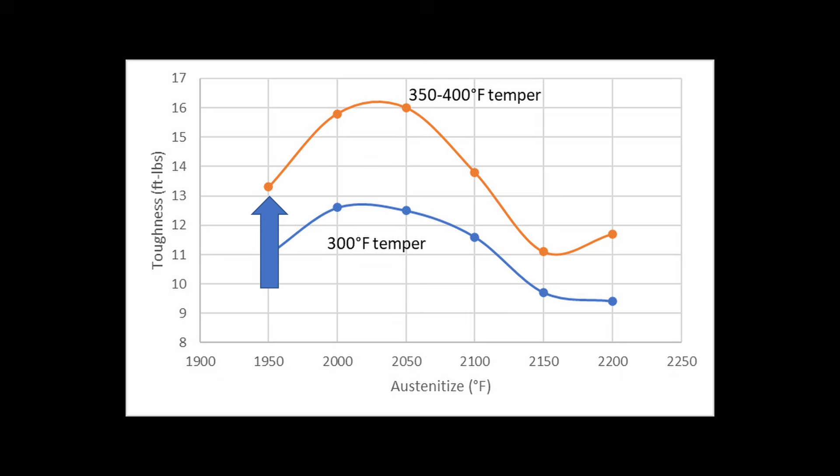On the subject of tempering, there is a phenomenon called tempered martensite embrittlement, where when you temper within a certain range, the toughness is reduced even though the hardness also went down. This typically happens in the range of 500 to 700 degrees Fahrenheit, though the exact temperature where it starts varies by steel.

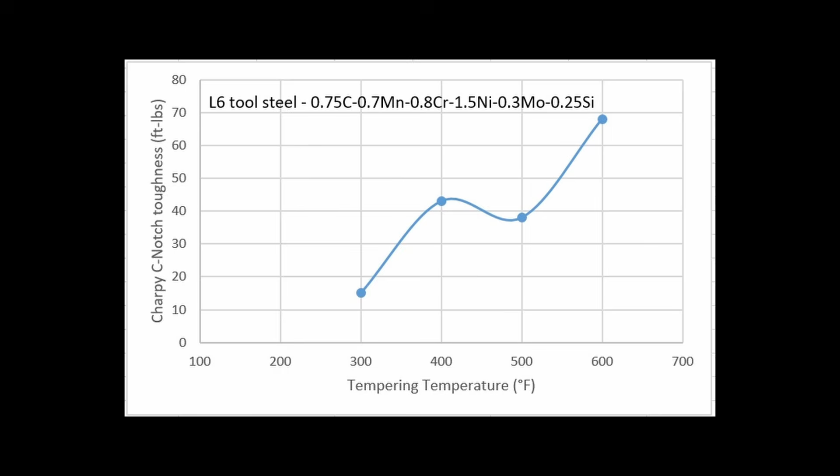With S35VN, I found that tempering at 500 degrees led to a reduction in toughness versus a 400 degree temper. The toughness didn't fall off a cliff, the steel isn't ruined, but if you have reduced both the hardness and the toughness, then we have made the steel worse.

We could have both higher hardness and toughness, which is what we want.

I haven't tested the toughness of MagnaCut after tempering any higher than 400, but the fact that toughness was very similar between 350 and 400 degree tempering tells me that toughness is likely to go down with a 500 degree temper, similar to many other steels.

For that reason, plus the lower limit to the austenitizing temperature, I have not seen a good way to heat treat MagnaCut to hardness levels below 60 Rockwell, so if it were up to me, I would set that as the general lower limit for hardness when seeking optimal performance.

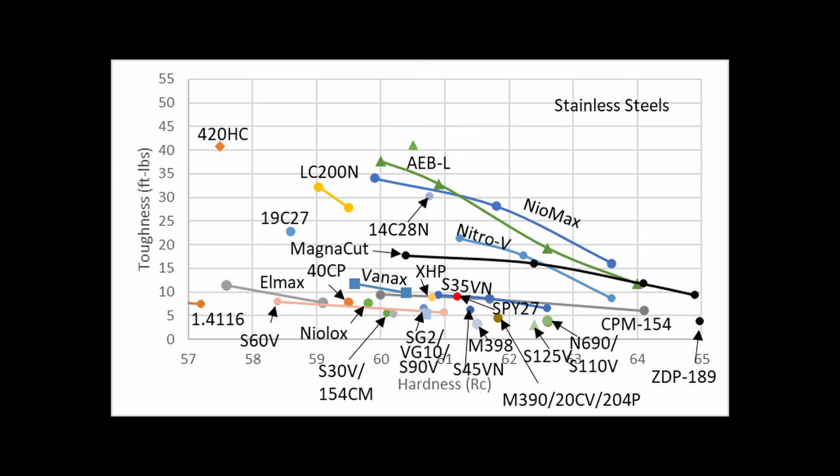There might be some caveats, such as if the steel were being heat treated with a relatively slow quench and without a cryo treatment and tempered at 400 degrees, perhaps it might drop into the 58 to 59 Rockwell C range without negative effects. It wouldn't be 100% optimal, but I wouldn't call it improperly heat treated.

There is also an emotional side to this. Knife companies and knife makers may have produced many knives in the past at a given hardness such as 60 Rockwell, and they are concerned that if they go too high the toughness will be compromised. If the edge retention is 10 or 20% lower than it could be, that is acceptable as long as they aren't getting knives returned with broken tips or significant chipping.

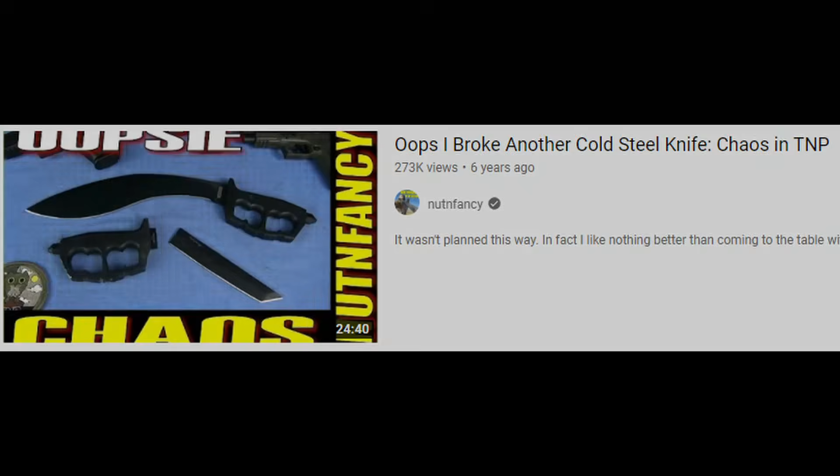Some of these knife companies have very generous warranties where they are actually replacing knives for free if this type of damage occurs. And a knife company's greatest fear is that an influential knife reviewer breaks a tip off during a review. That can be damaging to the knife company's reputation.

I see this emotional side coming up when knife makers contact me after getting higher than expected hardness after following one of my heat treatment recommendations.

Larrin, I followed your heat treatment recommendation for such and such steel and tempered at 400 degrees, but it came out at 63 Rockwell, and I think that is too high for this knife, so I'm going to bump it up to 500 and bring the hardness down.

I try to talk them out of it and tell them about tempered martensite embrittlement and how both the hardness and toughness will be reduced. Some of them listen to me, but some of them actually won't. They can't get over the hurdle that 63 Rockwell sounds too high, and they will feel better if it is a couple points lower. It is hard to break old habits.

So in conclusion, one thing I think should be said is there is no need for a witch hunt looking for knives with a hardness you think is a poor choice. A MagnaCut knife heat-treated to 61 Rockwell C is not garbage or a disgrace to the steel or whatever people are trying to say about what the ideal hardness is.

If the steel is heat-treated properly, then the selected hardness is primarily opinion. Do you want enhanced strength and wear resistance, or do you want enhanced toughness? A knife maker or knife company has not used the steel incorrectly just because you had something in mind for your own preferences as a buyer.

There have been many knives heat-treated to 60 RC or even lower that had excellent performance, and the fact that MagnaCut offers new performance possibilities doesn't change that.

Hopefully this video answered some questions about why knife makers and manufacturers are picking one hardness versus another without simply saying it's complicated. Unfortunately, that means that we did get into some things that can be complicated, and without previous knowledge about heat treating and knife steels, you might be a little lost.